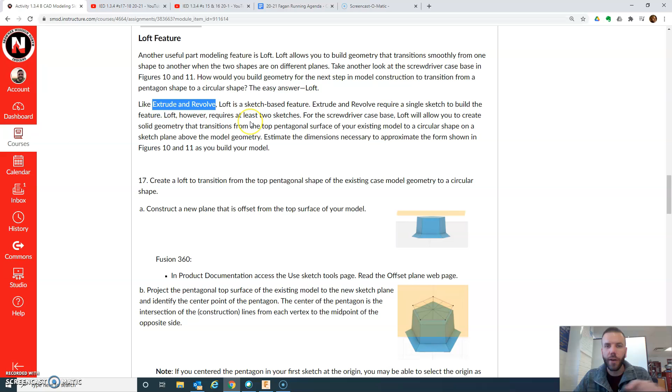Okay, so let's get started so you'll understand more what that is. The first thing we want to do is create a new plane to work on. So I'm going to use construct, an offset plane. That's the easiest plane to make when you're trying to make what we call work planes.

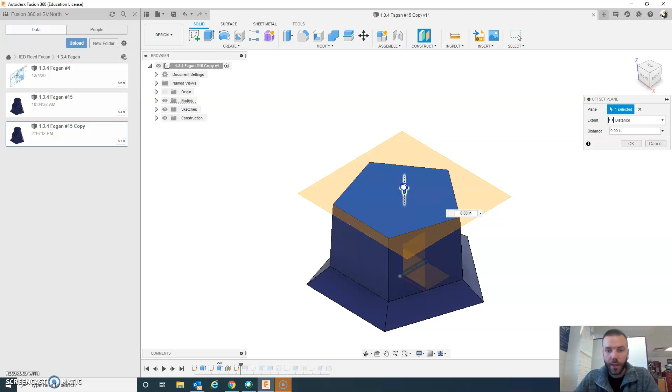So we're going to click this surface and just drag this thing up. You can look at it straight on by clicking the front view to see how it's looking. I kind of like this distance, so I'm going to say okay. Now I've got this new plane I can start a new sketch on.

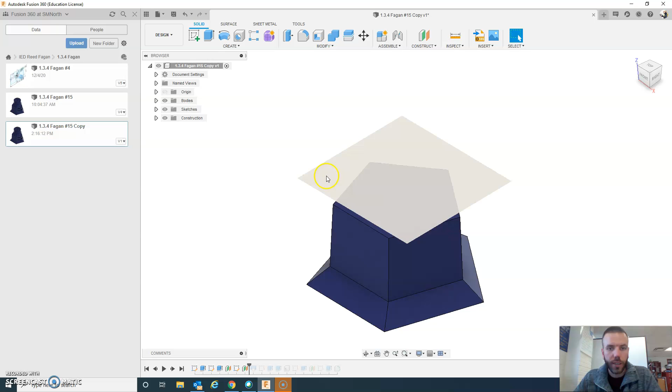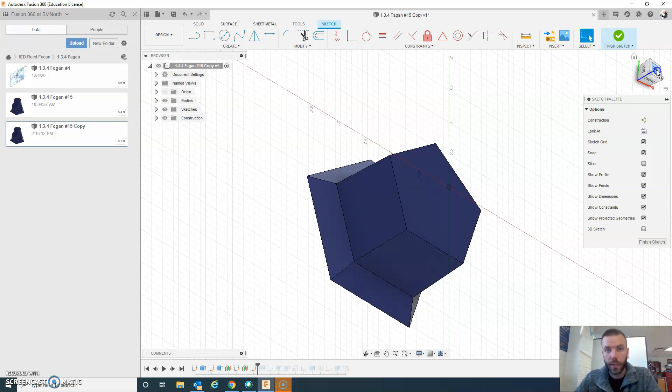So I'm going to right-click on here and say Create Sketch. What they want us to do is take this pentagon and turn it into a circle, which is pretty cool. We're on a new sketch now, and I made sure to click that plane. Be careful that when you go to create your sketch, you don't click this one — click the new plane that you made. If you're having problems, double check that you did that.

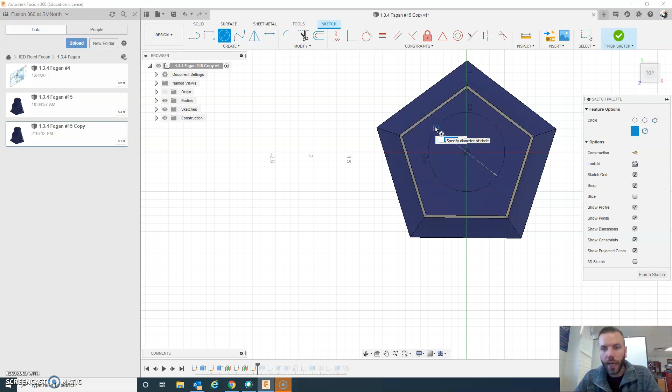So let's do a center diameter circle. I was a little afraid it would do this — see how it's closer to the top edges of the pentagon than the bottom? That means it's not quite centered with the pentagon. That's okay, but we don't want that. So I'm going to cancel out of this because I already started it at the origin, and that means a coincident constraint was in place.

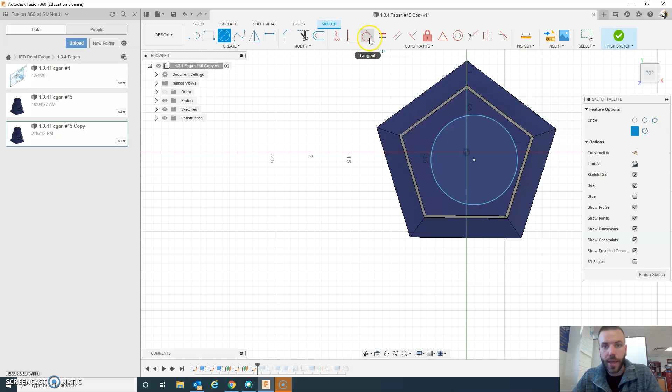Instead, let me just pick a place over here, and make it that big. Notice I did not actually put a size in yet. So we'll use this thing called tangent constraint, and make it tangent to that edge, and tangent to this opposite edge. That did not do what I wanted, so let me back up with Control Z. Let's try tangent to here, and now tangent to there.

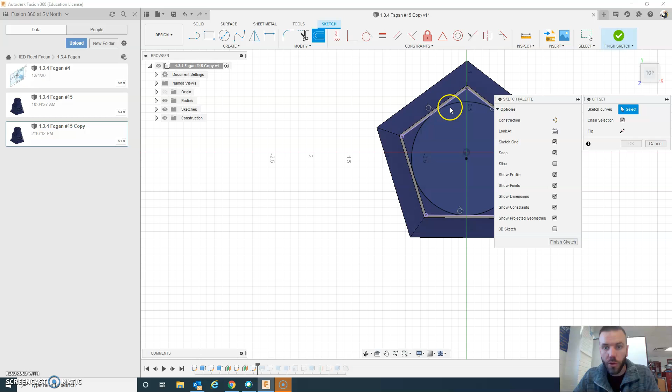There we go. Now this is centered, but it's a little big. So there's a really cool feature you're going to learn here that I didn't intend to teach you, but you will — I'm done with the tangent constraint, so I'll say okay. This is the offset tool, and basically you can take any geometry you have and either shrink it or expand it. I'll just say like this for now and hit enter.

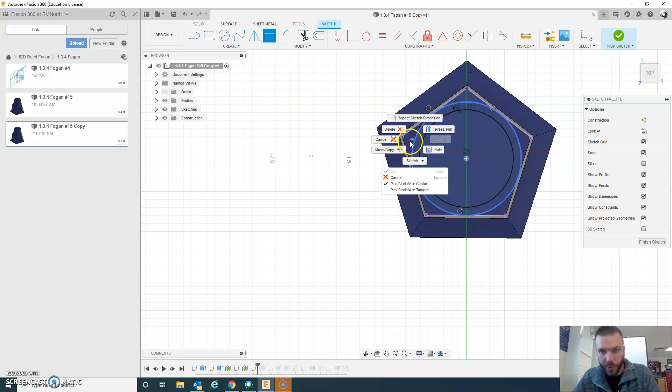And then I'm actually going to dimension that here. Let me see... actually, I don't want to do that — I was about to create a driven dimension, and I do not want a driven dimension. I guess what I'd have to do is delete the circle this came from and see if I can do that. That might make it angry, we'll have to see. Okay, I think we're still centered — it looks like we're still centered, so we're good there.

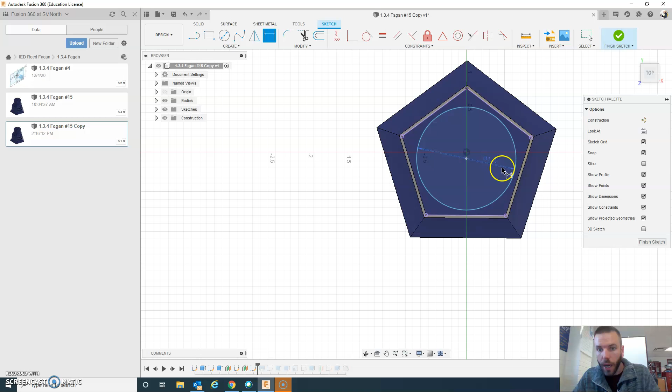So yeah, change the dimension of this thing, and I want to say maybe like that, okay? And it looks like it's even — we're centered with the pentagon, so we should be good there. Now we're going to click Finish Sketch. I know that seemed kind of complicated, but there are some reasons for it.

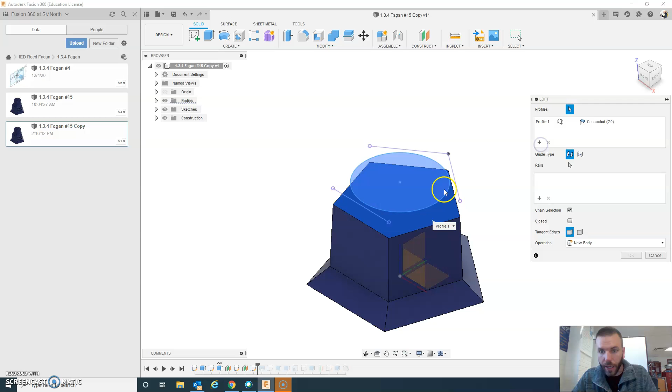So now we're going to do the loft. Lofting, you go into Create, find Loft — it's also Shift-L as the keyboard shortcut. This is a little different box, right? First we're going to select this profile here, then second we're going to select this profile here, the circle we just made. You can see it's already connecting them. There are other settings you could go through here, but for what we're doing, these are all correct, and we want to do a join.

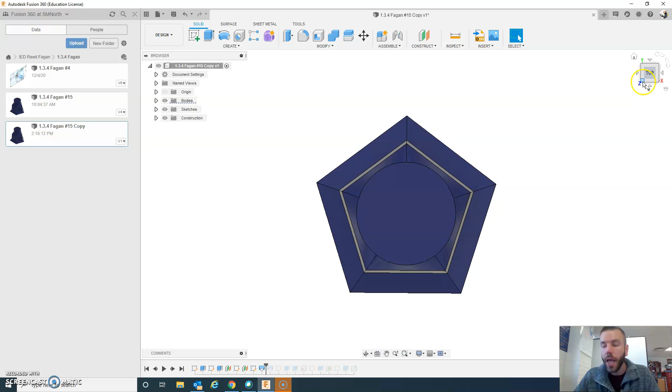So we're going to click OK, and voila, we have our thing. Now it may look a little off-center to you, but all you have to do to check is go to the top view, and we can see it is very much centered. So we're fine — the reason it looks off-center is because this is an odd-number-sided polygon, and looking at it from an isometric view, the only way it'll look right is if we got that vertex directly at us. If it was straight on, it would look even — that's why it looks a little off.